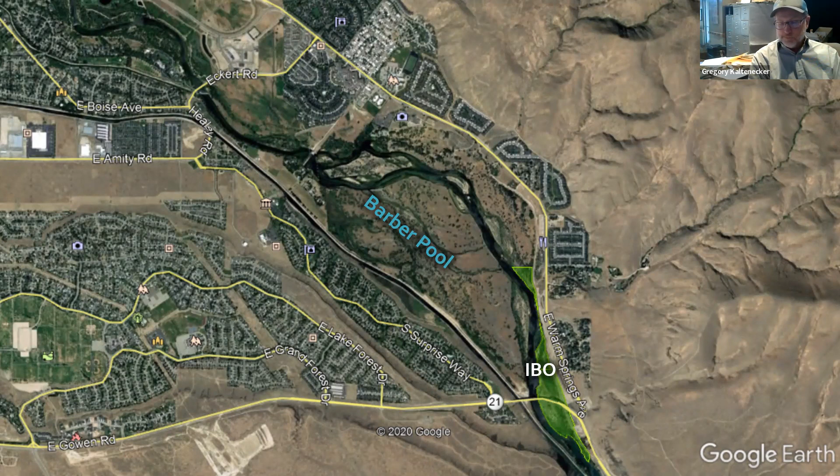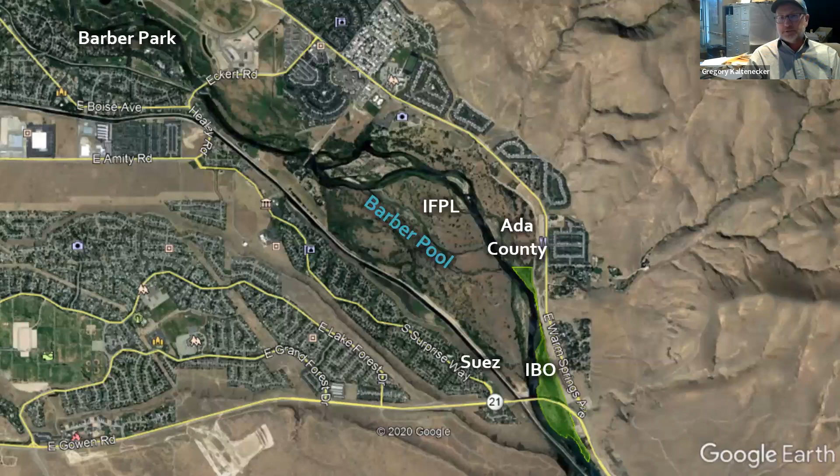The adjacent properties to the site, outlined in green, include the Idaho Foundation for Parks and Lands, a neighboring landowner that owns the majority of Barber Pool. Our property also abuts Ada County, Suez, as well as a property owner across the river. The site outlined in green actually has two different landowners: ITD, the Idaho Transportation Department, and Boise State University. We're upstream of Barber Park, Ada County's facility, by at least a couple of miles, and there's property owned by Suez as well.

Let me go back there. So to begin with, this has been kind of a long process.

Back in 2012, we began working with Idaho Transportation Department to transfer about 12 acres to Boise State University. This property was originally secured by ITD as riparian mitigation related to the Highway 21 bridge construction. Rather than transferring the property, we negotiated a long-term management agreement with ITD. This agreement allows Boise State, and in particular the Bird Observatory, to manage this property to improve native habitat, conduct research, and most importantly, to pursue community education.

A couple of years later, in 2014, the university actually purchased the adjoining property. We negotiated to purchase this adjoining property totaling over 10 acres. So now Boise State either owns or controls more than 22 acres of Boise River floodplain in Barber Pool.

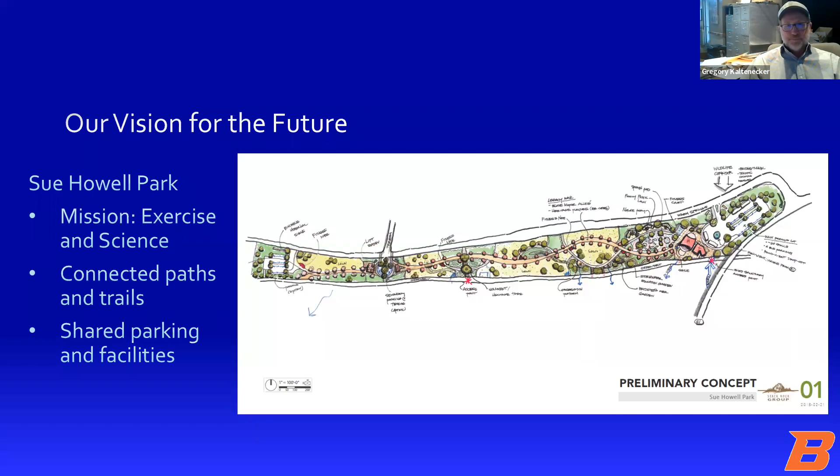Much of this community outreach I'm talking about has already begun. You may have already been involved with the IBO in some way—I noticed a lot of familiar names on the list today. So you might be familiar with how we're engaging the community, but I want to highlight the variety of programming.

That's ongoing at the Diane Moore Nature Center and talk about our future plans as well. Thanks to Heidi and other staff members, we're very passionate about education, and we don't just limit that to K through 12. We provide what we call K through Gray—education opportunities for all ages.

Thanks to a huge number of community partners, we're already working to restore upland and riparian habitats at the site. We've planted over 4,000 native plants so far, over the last 3-4 falls now, I think. And once the side channel is complete, we'll have even more opportunities for volunteers to dive in.

So if you haven't already, we invite you to join us for one of our community planting days, and there should be some of those coming up within the next few months.

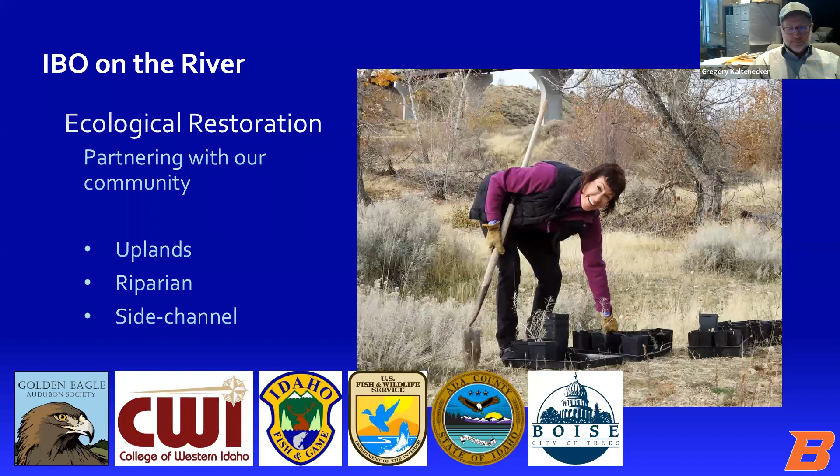One of the reasons we're so happy to have this site and to be developing the Diane Moore Nature Center is that it provides the perfect opportunity for students to really study in an outdoor laboratory. Our field trips aren't just tours of the site for students—we get students involved in science firsthand.

Even little second graders from Anser Charter School have helped us collect useful plant survival data in our habitat restoration experiments. So along with field trips, we also offer independent projects as well as internships that are perfect for older K through 12 students and university students alike.

And this area really, it's just the perfect place for the community to learn about the Boise River, its natural processes, and its importance to native wildlife and habitat.

At the Diane Moore Nature Center, you can really get your hands dirty with volunteer work on our habitat restoration projects. And I think I mentioned, since...

2018, I think about 400 of you have joined us at the site to plant these 4,000 native plants. You've also helped us with weeding, with cleanup, as well as monitoring the success of our restoration efforts.

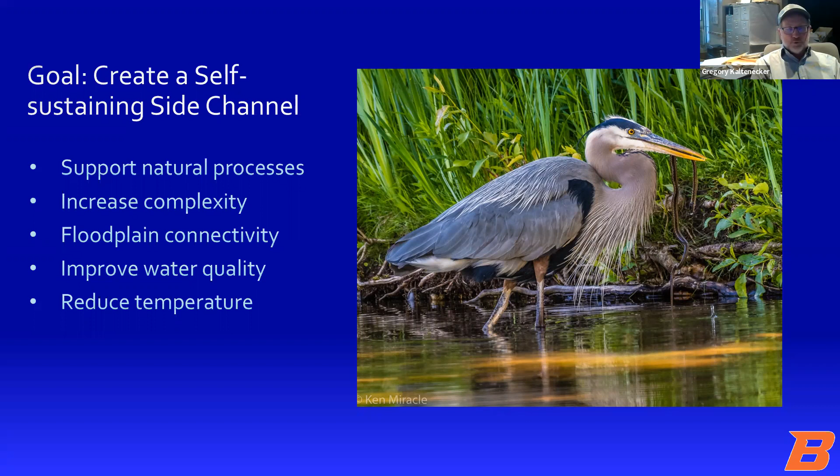One of our main goals with this project is to create a self-sustaining side channel of the Boise River by reconnecting a historic channel with the main stem. We want to support natural processes that will increase complexity of the system, improve floodplain connectivity, improve water quality, and help to reduce or moderate temperatures as well.

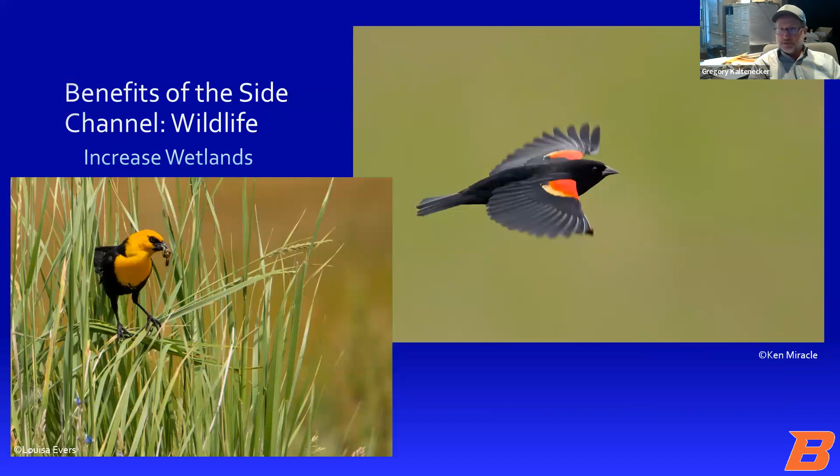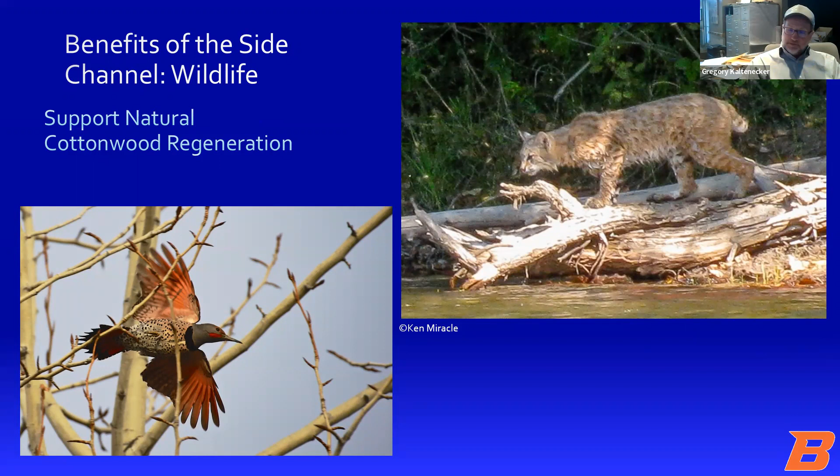Benefits from this side channel are going to include things like improved riparian vegetation, and the side channel is actually increasing the amount of wetlands on the site as well. It's going to help support natural cottonwood regeneration at this site, create spawning and brood rearing habitat for fish, and increase macroinvertebrates.

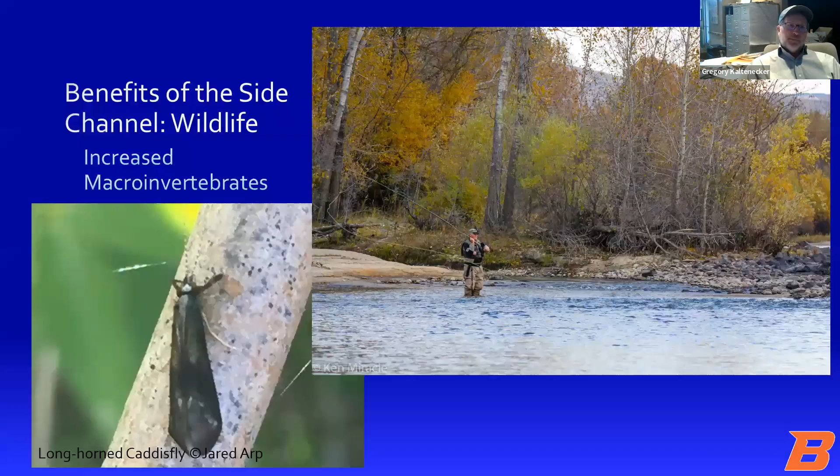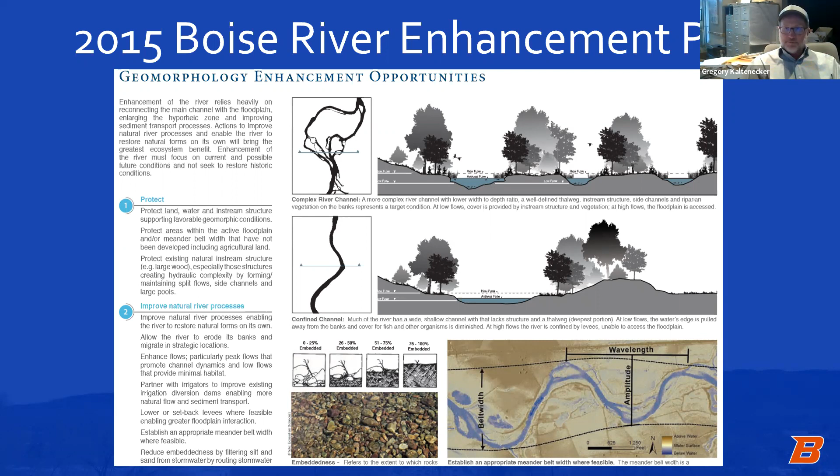None of this should be new information to Bren for sure, and most of you in the audience as well. In fact, in Bren's 2015 Boise River Enhancement Plan, they talk about the benefits of side channels and recommend creating more side channels along the Boise River. Indeed, in the reach where our project is located, there are fewer of what Bren calls habitat units—these are pools, riffles, and runs—than many of the downstream sections. This is also pointed out in their Boise River Enhancement Plan.

Let me give you a little bit of history of how the side channel project actually got started. We began this process about 4 years ago. Since we're a university program, a state entity, we had to work through the Department of Public Works at the state level to select a contractor. Our first step was to conduct a feasibility study and generate a concept design.

We engaged Jacobs, formerly CH2M Hill, to do this work, and in my opinion their team really did an excellent job for us in creating this concept design for the side channel. One of the related tasks during this concept design process was that we had to engage and involve local stakeholders and local landowners.

It just turns out that Suez and Micron share an intake on the Boise River directly across the river from this property. And so this is how Micron originally got involved and became aware of the project, and began to become interested in helping make it happen in our community.

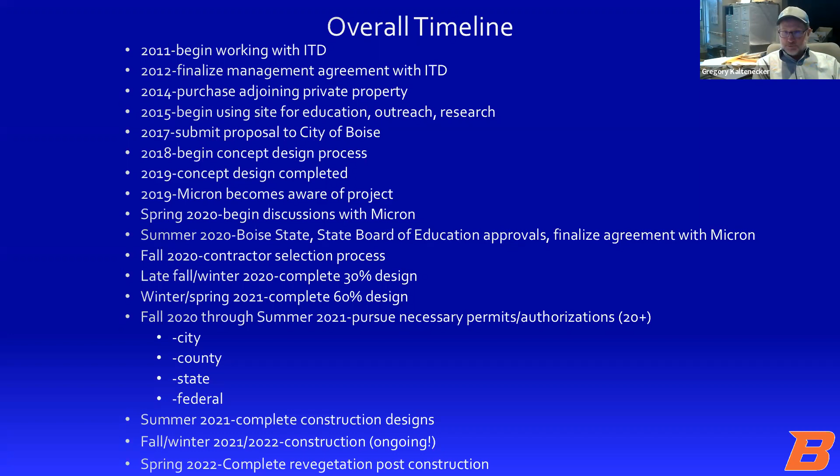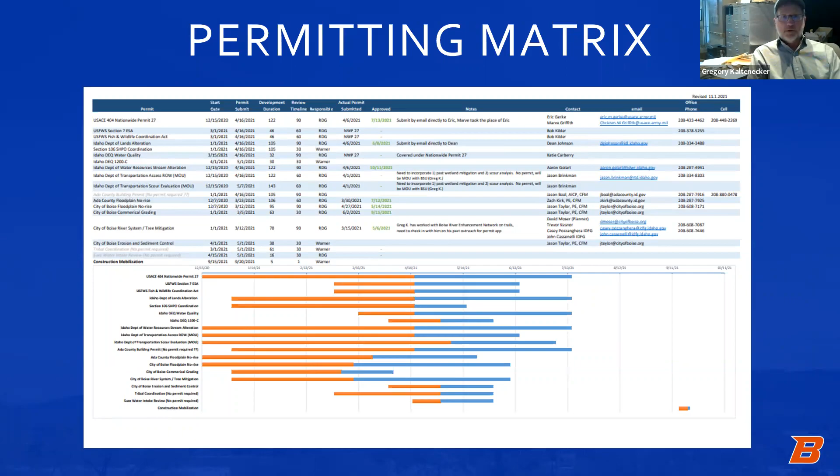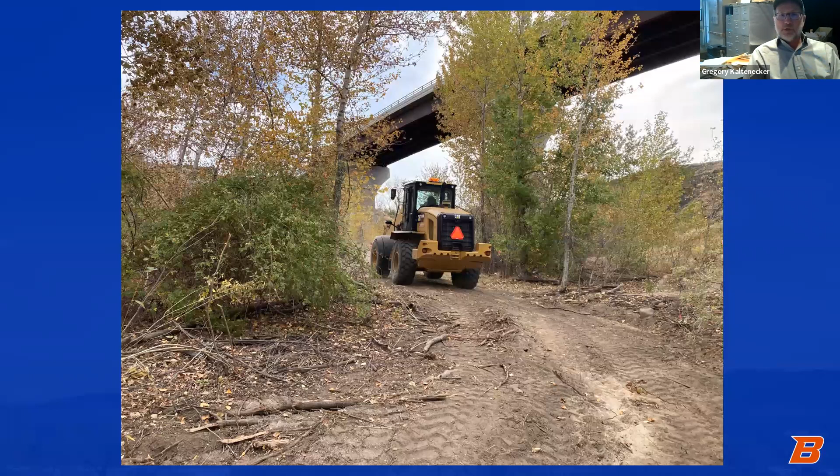We did take out a number of cottonwoods. We continued to modify the design as time went on, and to create meanders to miss as much vegetation as we could. However, there were a number of cottonwoods that were taken out to do this project. Here's what it looks like after the vegetation was removed—it was piled up and temporarily stored, and then every bit of it was reincorporated back into the design.

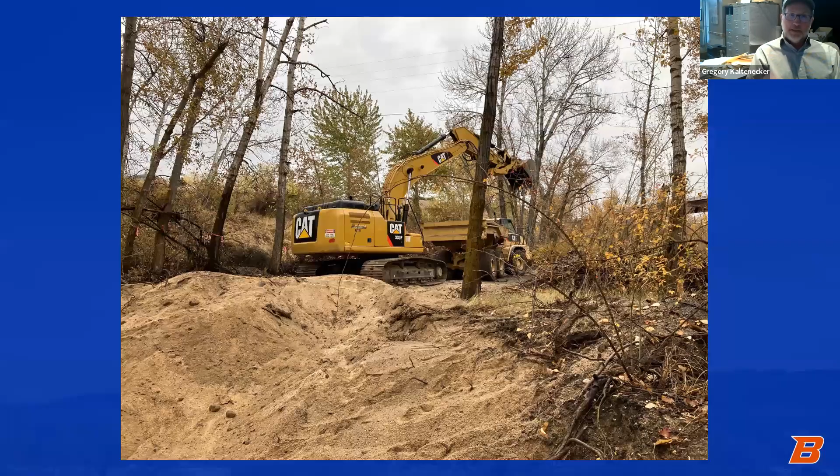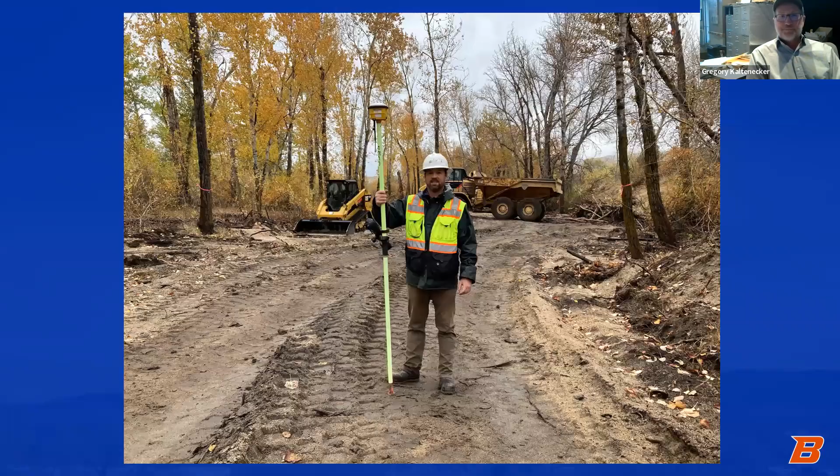The next phase of this process is what the contractors call Mass Ex—I learned a whole bunch of new terms during this process. This is mass excavation, where they're removing as much material as they can and hauling it off-site. This material was not dumped on the ground; it was immediately loaded into this rock truck and moved off-site. During this whole process, there was one of these guys there with a GPS unit, making sure that the excavation was done as per plan.

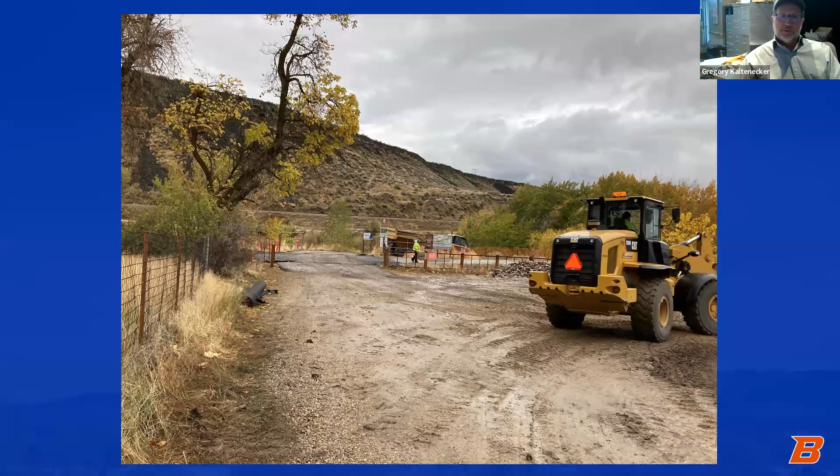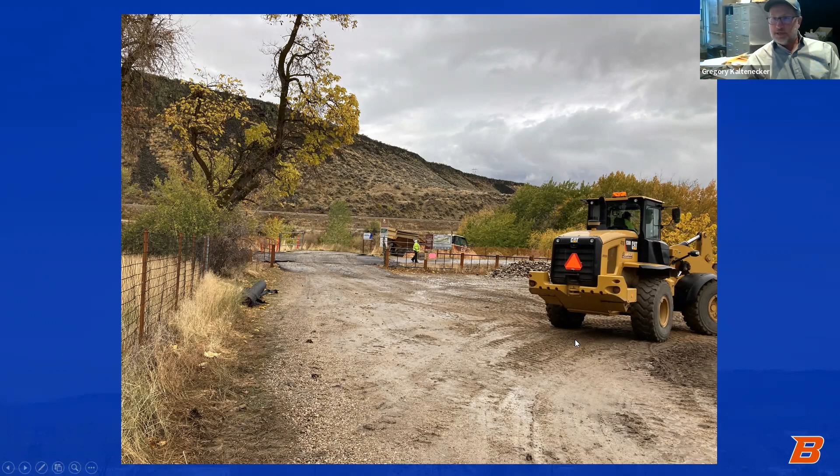This is what the channel looks like, kind of roughed out with the mass excavation done. The material was hauled across the green belt and into a temporary staging area, and then hauled off site.

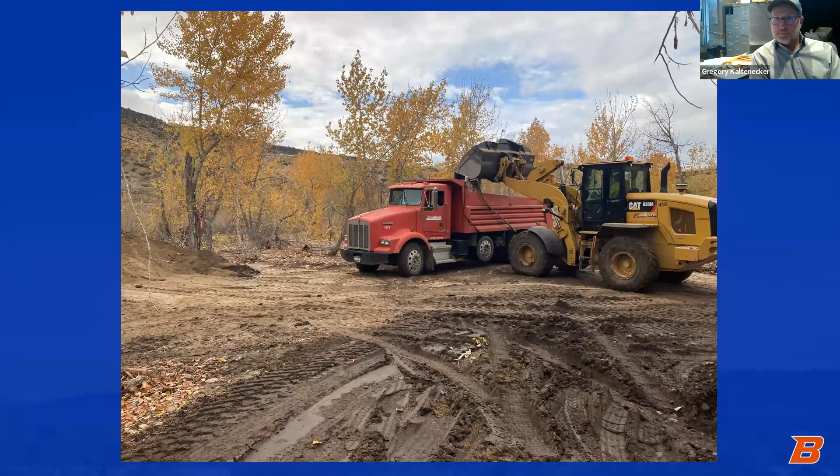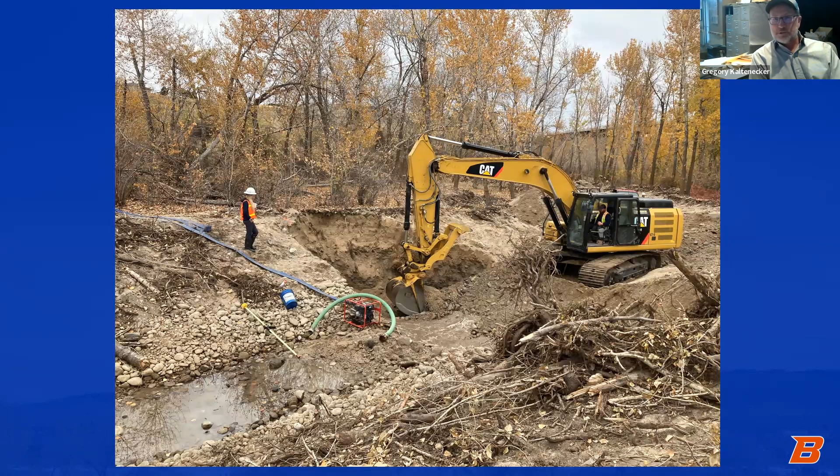I want to highlight a number of features that were incorporated into the side channel design. This is a slide of the crew putting in a monitoring device, or a measuring device, basically a water control structure.

As part of our water right, one of the stipulations is that we needed to have these water control structures not only at the intake, but at the outflow as well, so we could measure the flow. We applied for and received a non-consumptive water right, so we had to have the ability to prove that this water use was actually non-consumptive. This was quite a process.

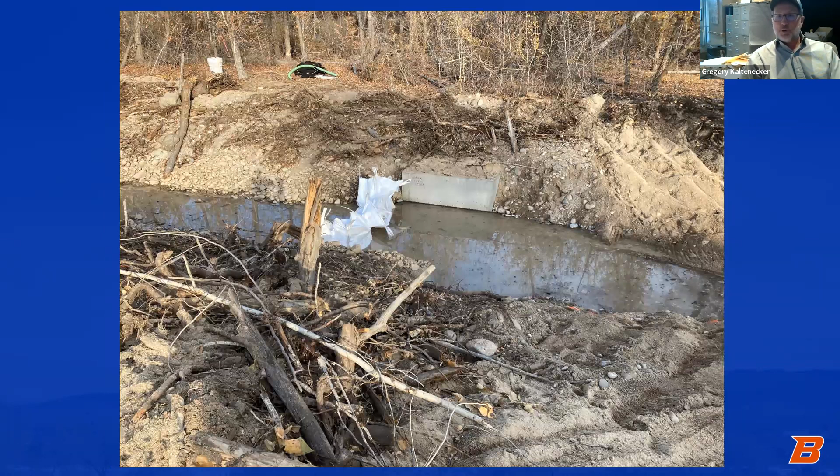Here they are excavating for this water control structure, and here's the finished product. You can see these concrete boxes - I think there are six of them that make up this water control structure. Note the silt bags here, keeping sediment and any suspended solids out of the river. This is what it looks like when it's all done.

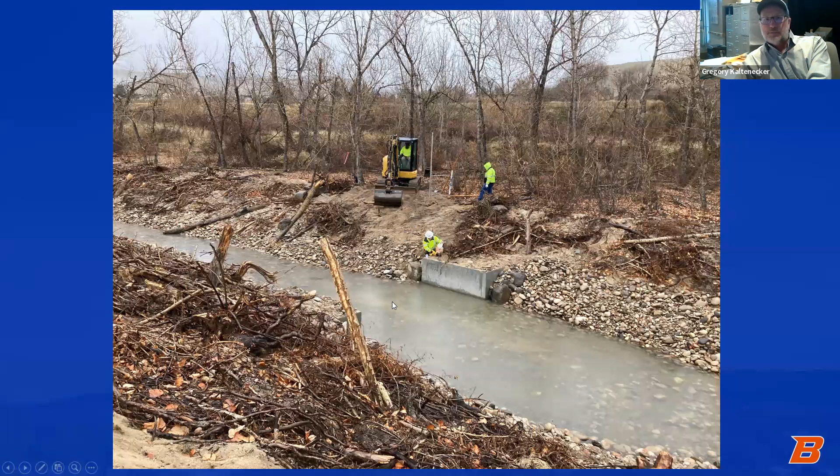Here's a crew actually installing the monitoring device. It sits along the side of the channel with a solar panel generating data. Pretty interesting stuff, I thought.

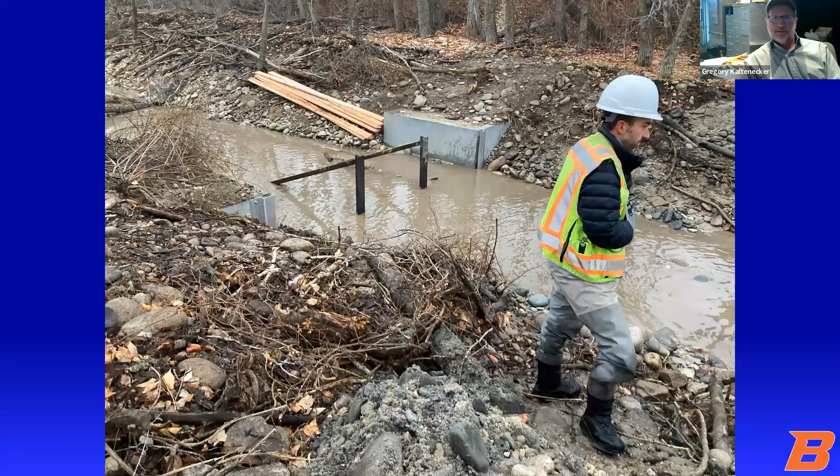This is the one at the upstream end of the channel. Notice there's the ability here to put stop boards in this water control structure to actually stop flow into the channel when the river is below our target. I think the engineering design called for the side channel to have 25 to 30 CFS when the river reaches 600 CFS at the Glenwood gauge. So until it reaches 600 CFS, we're required to stop flow as much as we can into the side channel. That's the upstream water control device.

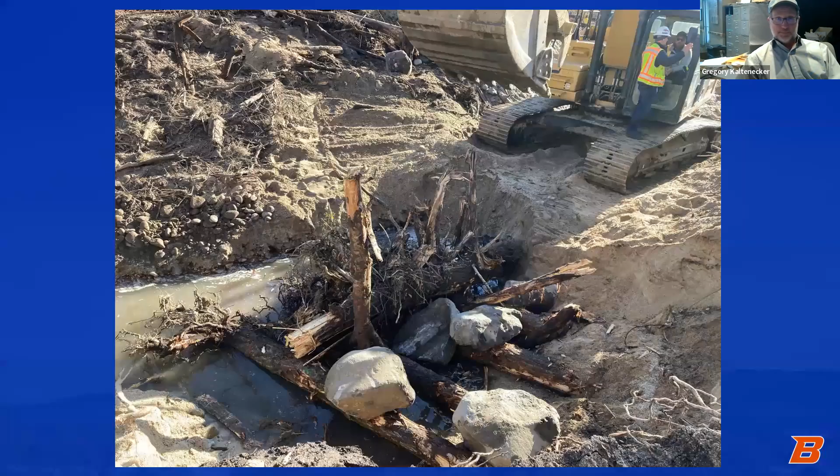What was really interesting to me, being not only a biologist but also a fly fisherman and someone into conservation of the Boise River, was to see how the design incorporated all this woody debris and these different materials back into the channel. Here's an example of woody debris being placed into a pool.

Another thing I want to point out is that there are a number of habitat features throughout the length of this side channel. It's not all the same width and depth, not all the same elevation. There are pools that were engineered, riffles and runs, and each pool has at least one of these woody debris piles engineered into it. This shows the woody debris in an unfinished state, showing how it's anchored into the bank with boulders. This is later covered up so that the woody debris sticks out into the pool and has area underneath it, behind, and even within, to create fish habitat. It was really pretty cool to see all of this come together for me.

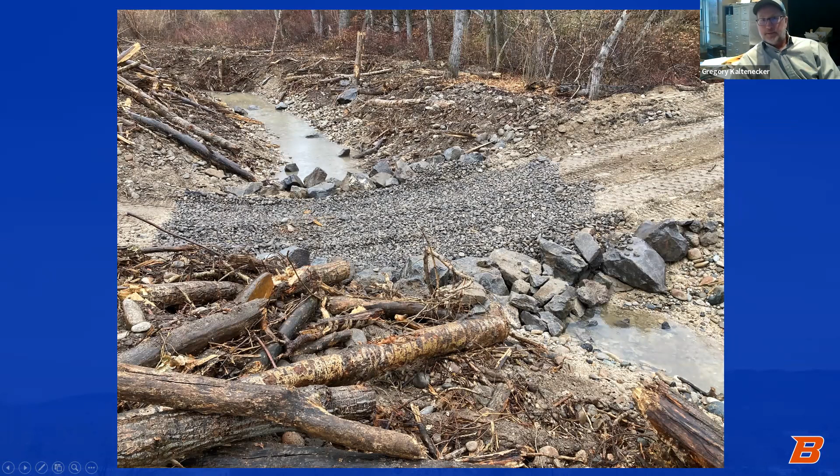Another feature is that we needed to maintain vehicle access to the site, so this is along the main access road. The contractors ended up doing what's called an armored crossing. It's still under construction here, but this crossing allows a vehicle to cross into the site, thinking about needing to get emergency vehicles or monitoring equipment in, into the future. These rock sills sit at the same elevation as the bottom of the channel, and in between them it's filled with gravel to create a hard surface for vehicles to drive on. They're still working on this, but that's another feature.

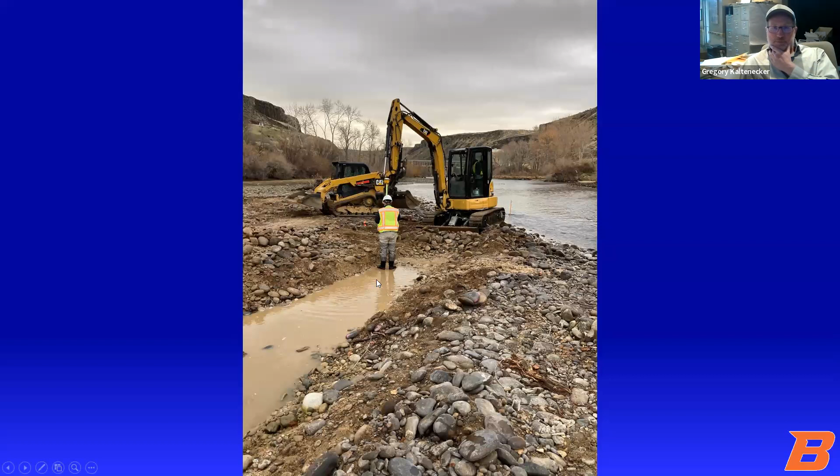Here's an engineer working, really every step of the way with the GPS unit, to make sure we're at the right elevation as we get closer to connecting with the river. Here they are again, working at the inlet before connecting to the main stem.

So what's next? The next phase for us is we have to go through this process all over again to design and permit paths and bridges at the site. Remember, I mentioned our grand vision is to have one trail system, not the maze and network of social trails out there now. We want one trail that confines human use. Now that the side channel is going to be complete, we want to continue to have public access to the site, so we'll need a couple of bridges to allow the public to get over the side channel and out onto the site. We estimate this will be about another year or more to design and permit these features, with a number of permits involved at all levels. We're working on that now with River Design Group under a separate contract from the side channel.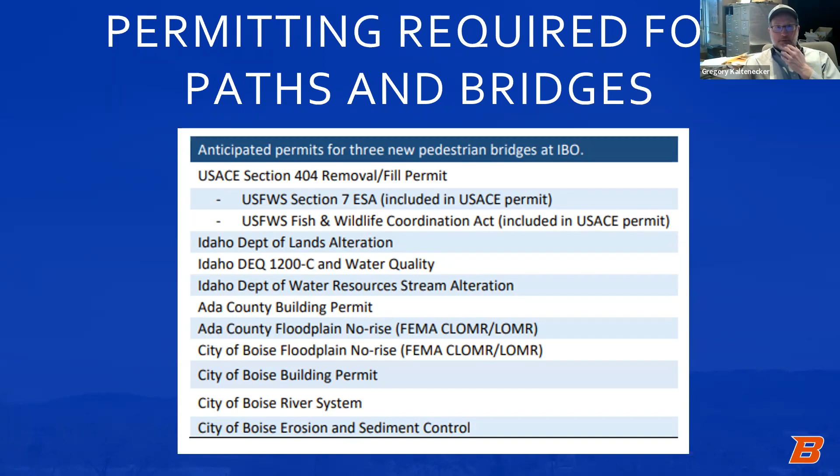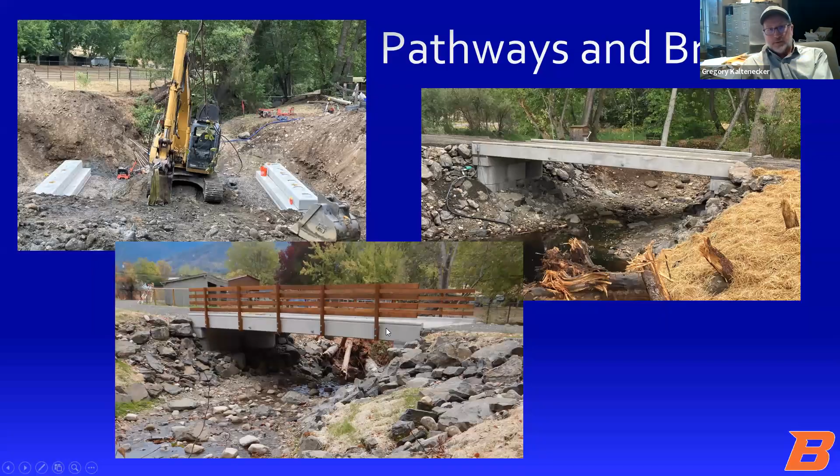We're really excited to start working with all of our existing community partners, as well as new partners like Boise Valley Fly Fishers, to create interpretive signage and designated access points for fly fishermen, things like that. We're really excited to get moving on community partnerships like this.

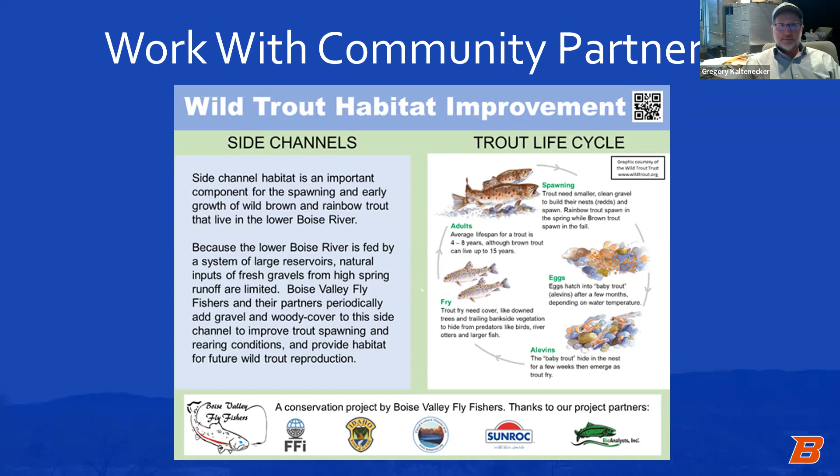I could never talk about the IBO without mentioning our bird research. We've been studying breeding birds at this site since 2015, so we have a great data set that will help measure the impacts, hopefully all positive, of the side channel improvements on the bird communities. I'm already imagining student projects using our data to understand this ecosystem restoration project over the years as the vegetation comes back.

I want to thank everybody that's tuned in today, and especially thank all of our partners. I will leave you with this.

Well, thank you, Greg, that is a great presentation. I had one more slide. Okay, if I can get to it. There you go.

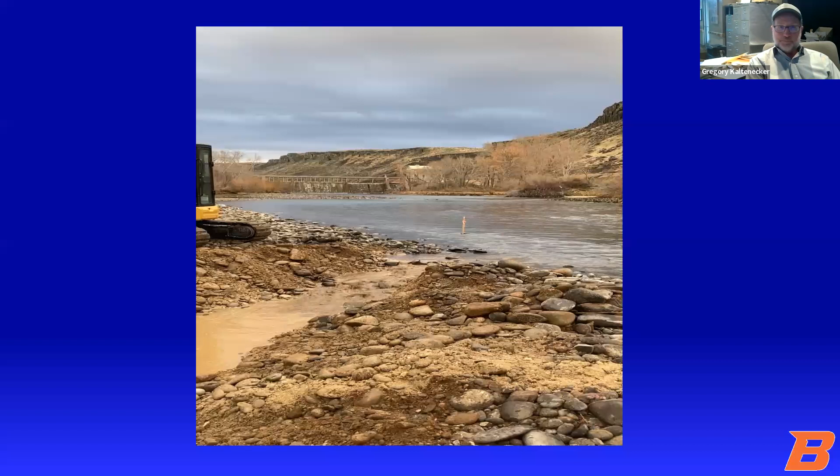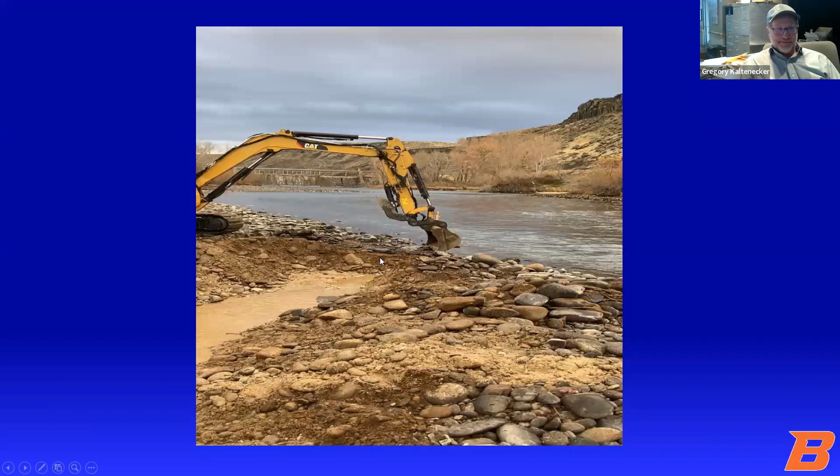That is pretty amazing. I guess we should be happy for motorized construction equipment. To do that all by hand would be quite a job.

Well, Greg, if you have the time, we have a couple questions in our chat box for you. Sure, I'll see if I can answer them. The first one is about the instrumentation you have on site, and whether you've learned anything yet about the potential connection to groundwater within the side channel.

That was all part of the concept design, as well as the last year and a half of design for the construction itself. We put in a number of different piezometers, and there are a number of wells already existing on the site.

Was I muted? I'm sorry. No, I don't think so, Greg. Okay, you're good to go.

There are a number of existing groundwater wells on the site already that are part of Boise State's geoscience program. They've been doing groundwater infiltration monitoring there for over a decade, maybe two decades. So we had a fair amount of information about groundwater and its height. What we found during excavation is that groundwater was seeping into the finished channel and trickling through a little bit, but we did connect with groundwater, which was a hope of ours to maintain flow during the low water winter months and help moderate temperatures. So our planning and research proved to be true at this point.